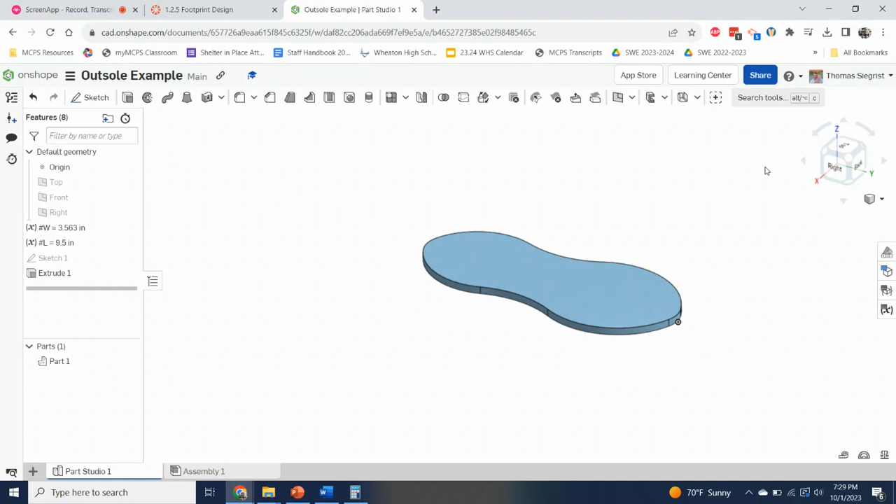What you need to do is make a tread. In order to do that, you want to make sure that you're not on the top, but on the bottom. So we're going to actually make our tread from the bottom here, and I'm going to sketch on the bottom. So I select the new sketch, click on the bottom, and you'll notice it says the face of extrude one. That's what we wanted it to say.

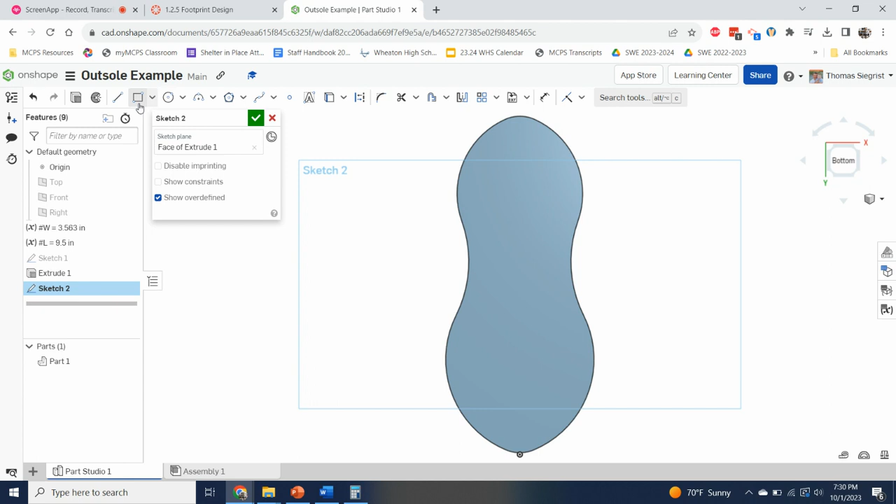Now to make my tread, you can do anything you want. I've used triangles. I've used all kinds of different shapes. I've made up my own shapes. Whatever you want to do. I'm going to just, for this example, use a rectangle. Now I do recommend that you make that rectangle come way outside. And I also recommend that you actually dimension that rectangle, right?

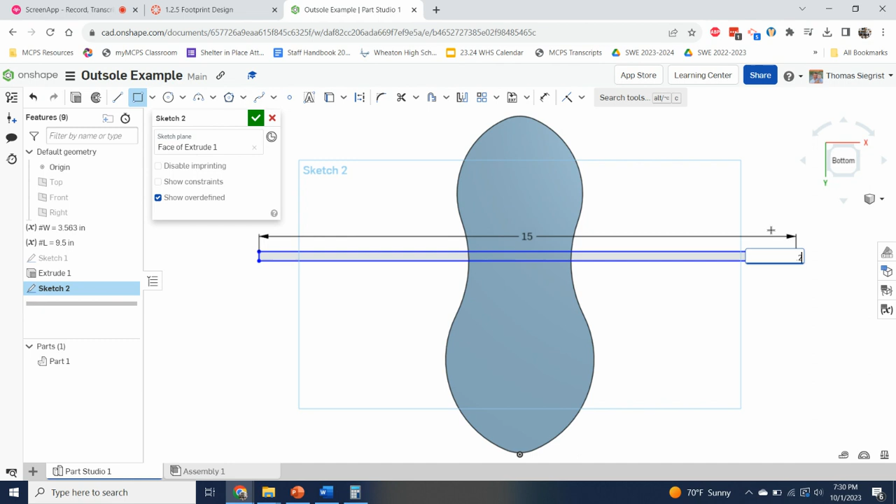So I'm going to make it 15, which is way too wide, I'll be honest with you. And I'm going to make it 1/4 of an inch, right? And I'm going to select checkbox. And then I'm going to go ahead and extrude it. And I want to make sure I select it, all 3 places. And I want to make sure it's an extrude add.

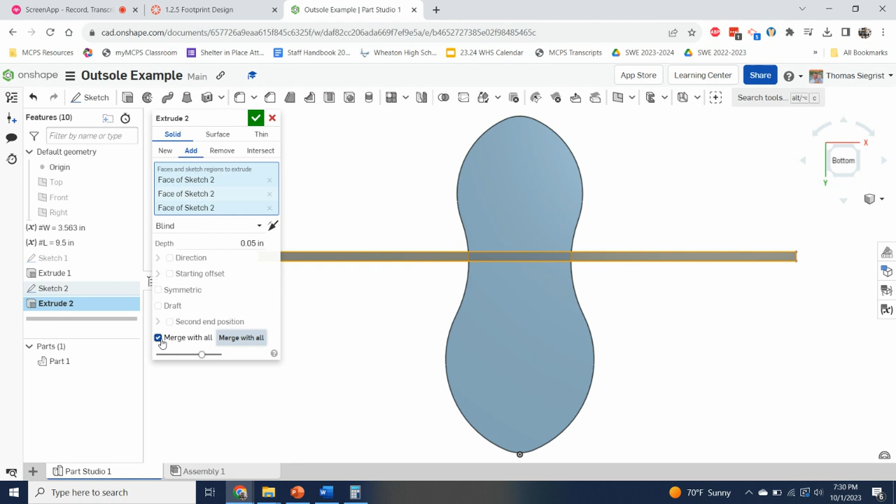I want to go 0.05 inches. I want it to merge with all. And I want to check that, right? So now I have it right there on the bottom. And now I want to make a bunch of them, okay? So I'm going to linear pattern it.

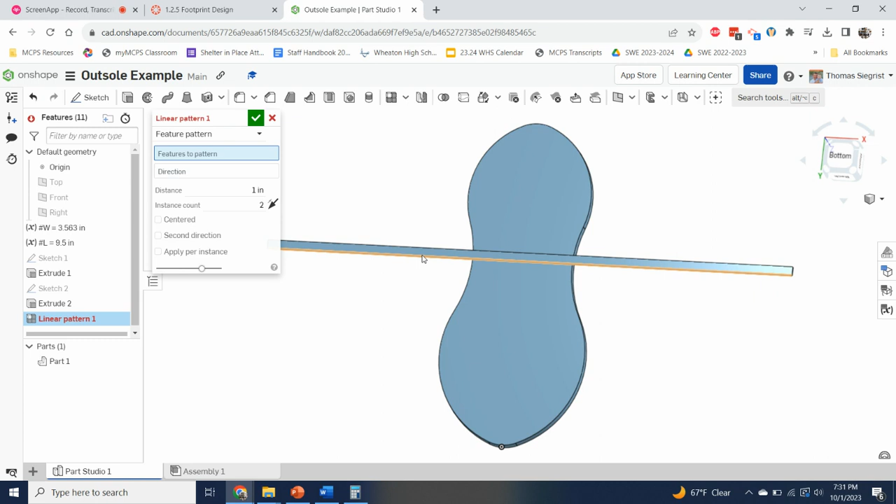And it says part pattern. You'll notice it selects the sole part of the shoe, which we do not want. So if you do a feature pattern, it actually lets you select just the tread that we made there. The direction we're going to use is the front. So I'm going to click direction. I'm going to choose front. You'll notice it puts 2 of them there.

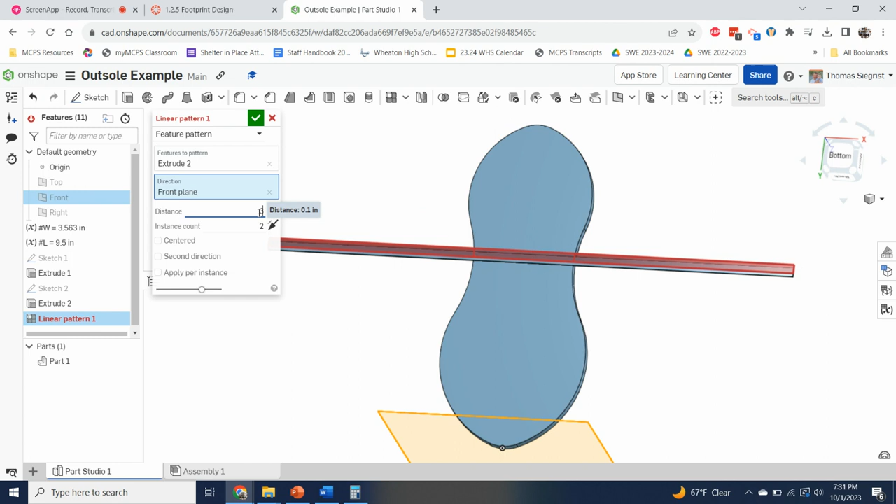I'm going to spread them out, I don't know, 0.1 inches. And let's see how that looks. Oh, that's too close together. It's got to be like 0.3 inches, right? And I'm going to have, I don't know, 20 of them. Center it, and I'll apply per instance. You'll notice when I apply per instance, it gets rid of all that ugly red stuff.

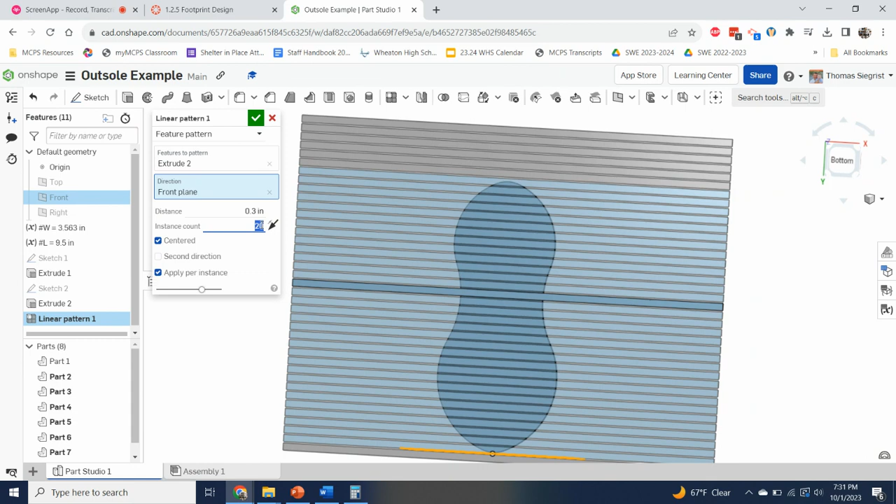Now the tricky thing here is, will that be enough when we make it bigger? I'm not positive that it will. So I'm going to go 25 of them. No, that's an uneven number. No, that'll be all right. That should be big enough, right? We could get a Shaquille O'Neal size shoe out of that. Just to be safe, maybe we'll go 30. And I'll check it. All right.

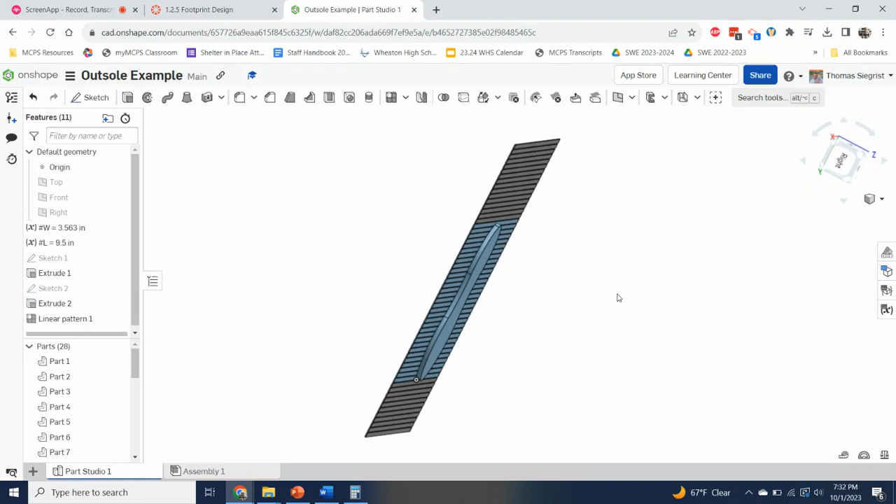You'll notice I can't actually see the sole now, and that's because I got too much tread there. And when we have too much tread, we have a problem. So to take care of that problem, I'm going to sketch on the bottom of one of those treads. Now, a lot of people accidentally click the bottom of the sole there and not the tread, and that'll be a problem for you later on. So don't do that. What we want to do is now bring that sole outline onto the sketch of the tread. So I need to use a tool called the Use tool, right?

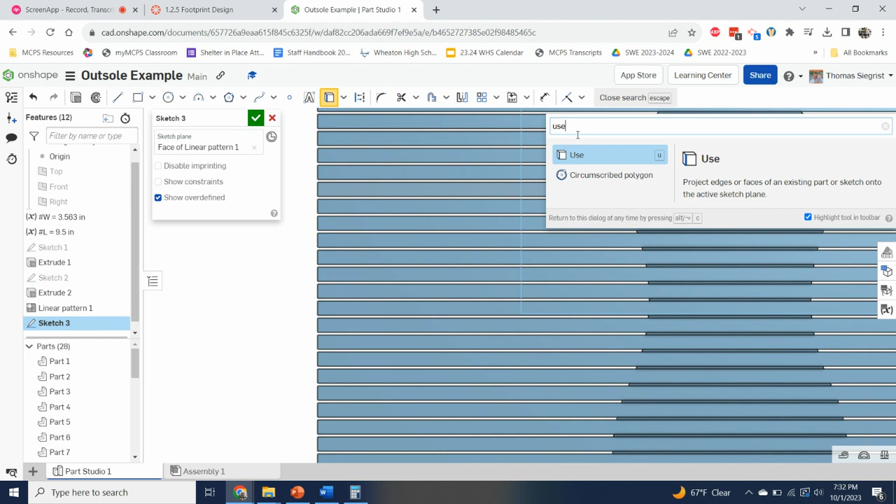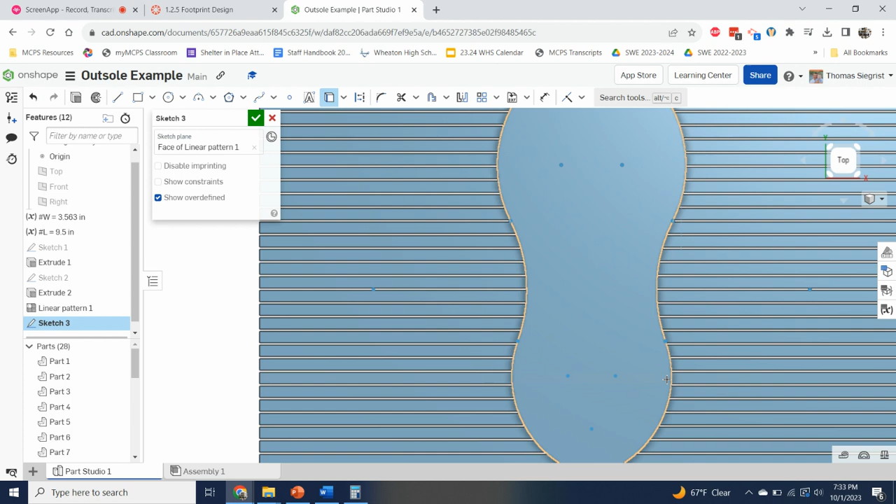And so I just do a quick search there for Use. And you notice it's really hard for me to actually click on it here. But if I go to the top of the shoe, it's actually really easy for me to click on it, right? And I'm going to just click all the way around this thing on all of them. And try not to click any dots, right? We just want to click the outline of the thing here. There's one. And don't forget this one down here. And this one. And coming up.

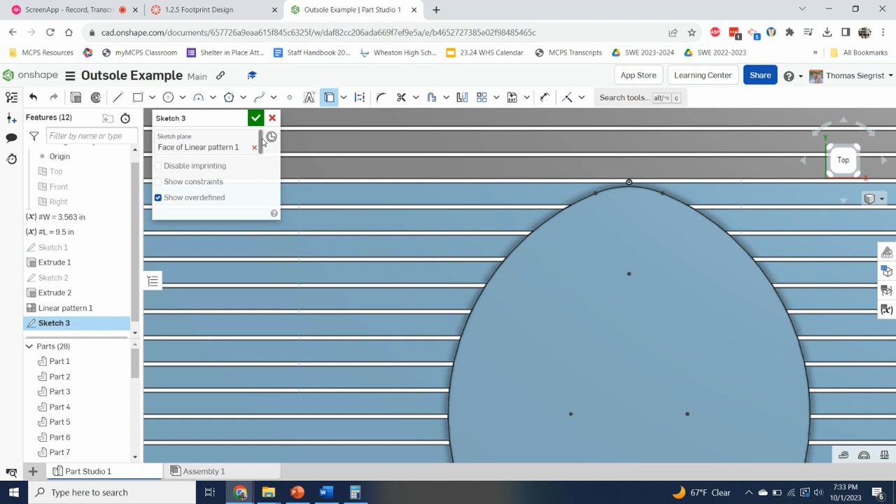You'll notice I got this one, but I didn't get this one yet. And coming up here. I don't know, I think I got this one up top already. But just in case, I'm going to click it again. All right. And flip it over to the bottom. And check it out. Look at that. We used it all. Perfect.

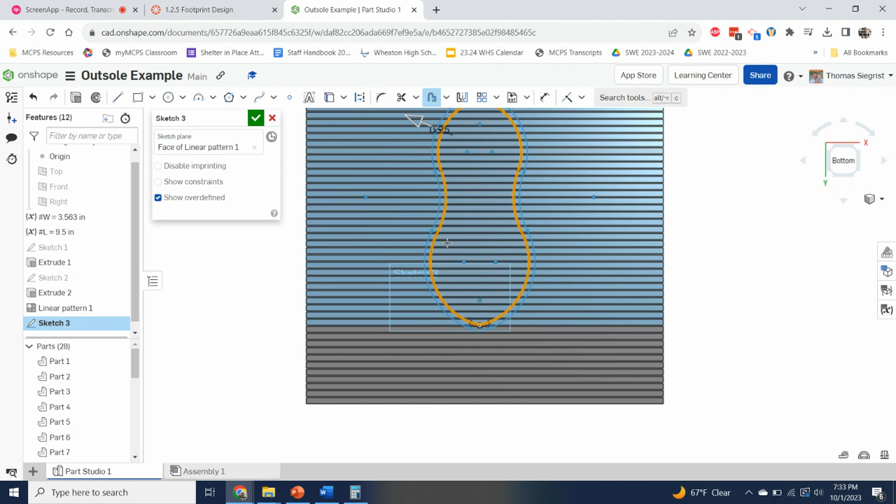Now we're going to go ahead and offset. And I want to offset all those same things. Now you'll notice the offset's going outside of the sole. And if you want your tread to go outside of the sole, I guess you could do that. It might be a little funky, be like a little platform. I want mine to go to the inside. Now don't drag it real far. You just kind of click and drag that arrow, and I want it to come inside.

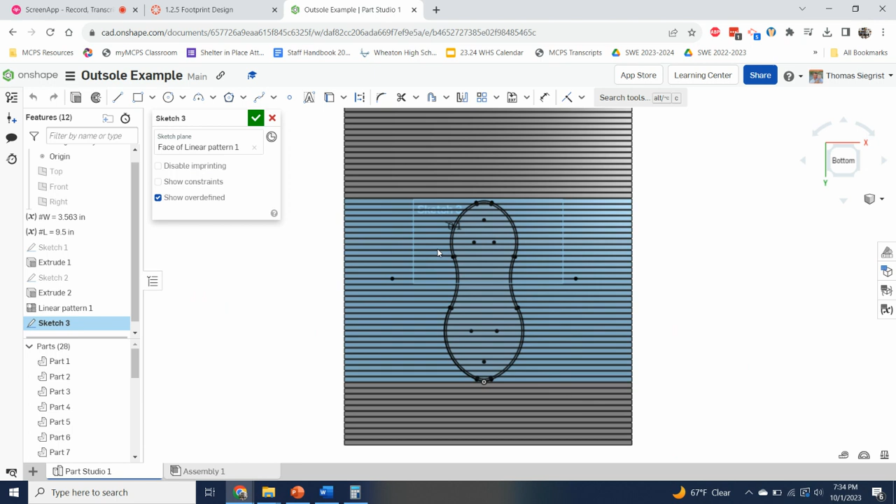When I click over here away from everything, it lets me then enter the dimension that I want to offset it. I'm going to go ahead and check box it. Oops, made a mistake. I didn't want to finish the sketch yet. One more thing, I got to put a box in that same sketch, not in a new sketch, in the same sketch. Make sure it's in the same sketch around that whole thing there. All right, and check.

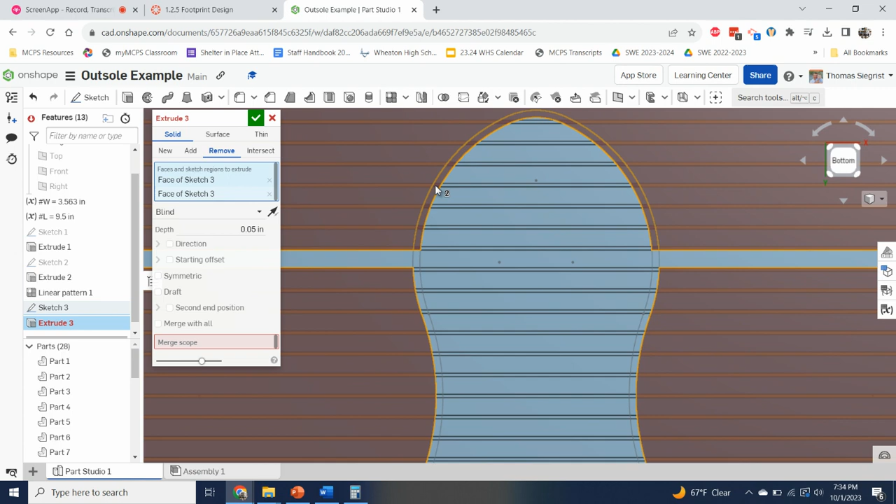And now I want to do an extrude remove, 0.05, the amount of the tread, of everything here and all this stuff in here. So I'm going to click that one, that one, that one, that one, that one, and that one. And that should remove all that good stuff and leave me with just the tread. Now you notice I said that was good enough and it didn't work, but I didn't click merge with all, right? So there you go, merge with all. I've got my tread on the bottom of my shoe. Isn't that beautiful?